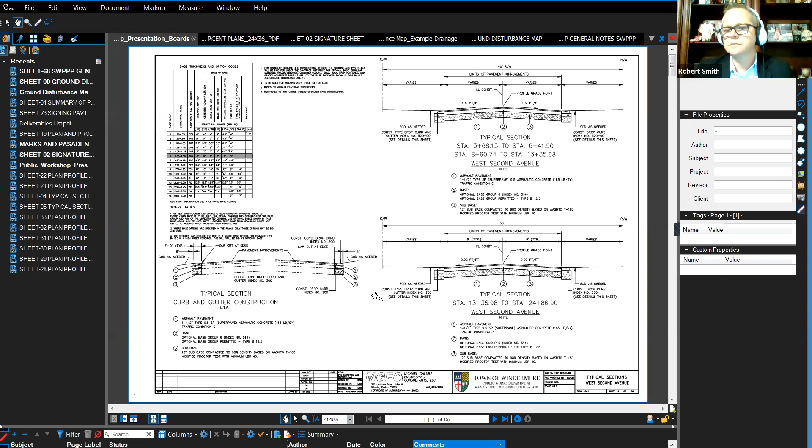From there, the project will extend east where it will connect to the existing section of West 2nd Avenue that was recently completed by the town. The roadway width is going to vary because we would just essentially be tapering from the existing pavement width on the east end and connecting to the cul-de-sac. So the pavement is going to slightly vary.

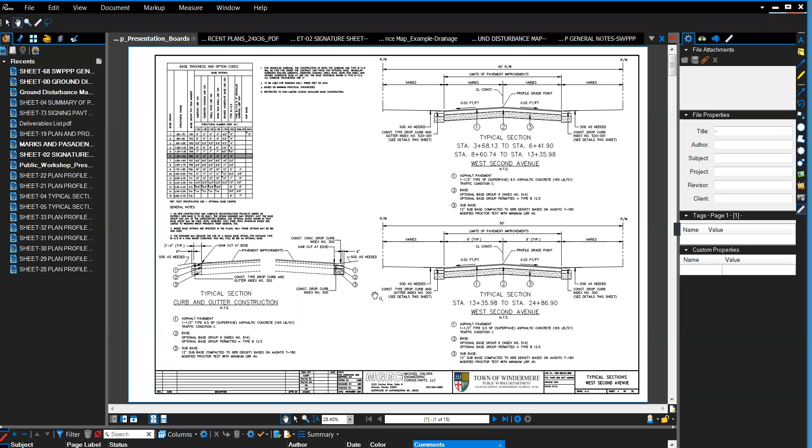It'll be somewhere in the vicinity of anywhere from probably 8.5 to 9 feet in general, but that's not fixed. It's going to be a transition type pavement width. Mike, if you can do me a favor and just go to the colored exhibits.

As most of the people on here right now know, a lot of the details sheets are Greek to me, I can't read it. But you can show where the existing and future improvements will be on some of these. These are items that were discussed at length with the property owners.

So they should have a good idea where everything's going to be located. I believe the blue is the water line. Is that correct? Blue is a proposed water main, correct? All right, thank you. The gray is essentially where the proposed pavement is to be constructed, and we've pretty much stayed close to the existing pavement width.

We'll be constructing a ribbon curb, which will provide strength and really provide integrity to maintain the edge of the pavement so that it doesn't break off. Mike, real quick for us non-engineers, what is a ribbon curb, and is it different from the curbing that is proposed throughout the entire project?

A ribbon curb is merely this right here. It's nothing more than a 12 inch by 12 inch concrete barrier that will be constructed along the edge of the pavement so that the pavement just doesn't break off.

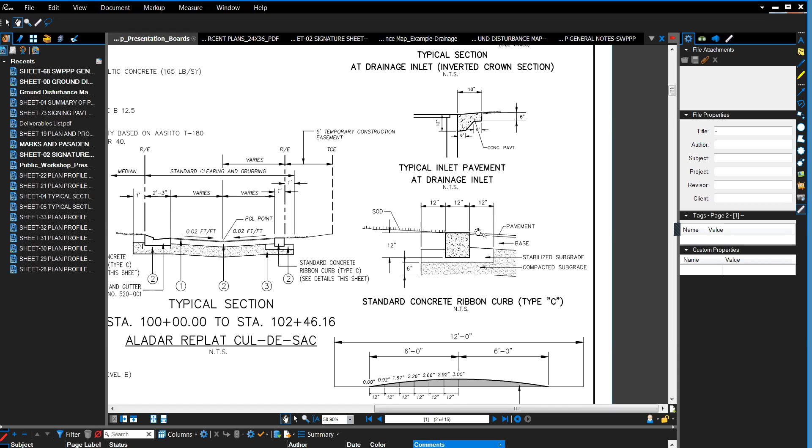All right, so something that you would see in a typical suburban HOA. Correct. You see a lot of it in this type of condition where it's in very tight quarters with really low traffic volume. And is that the same or different from what's proposed, like in front of McCarthy's house or the Kirby house?

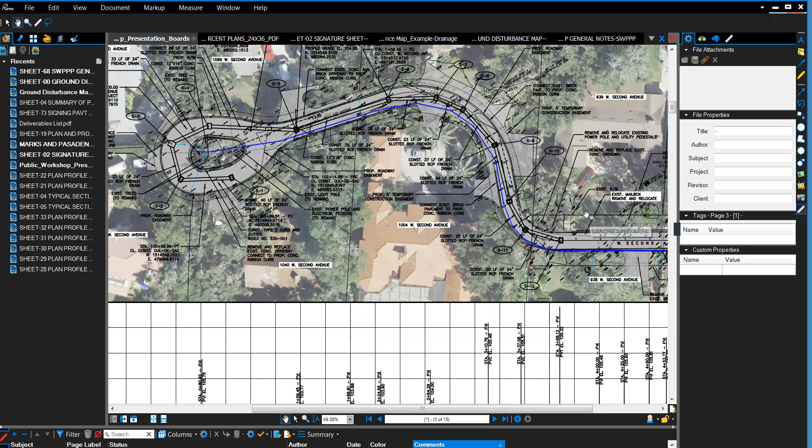It will be different because of our limited right of way. We ended up using a standard ribbon curb, which is only 12 inches in width. The curb and gutter we'll be using for other sections of the roadway will be approximately 2 feet in width, which provides a gutter to allow water to flow into the inlets that will capture the stormwater runoff.

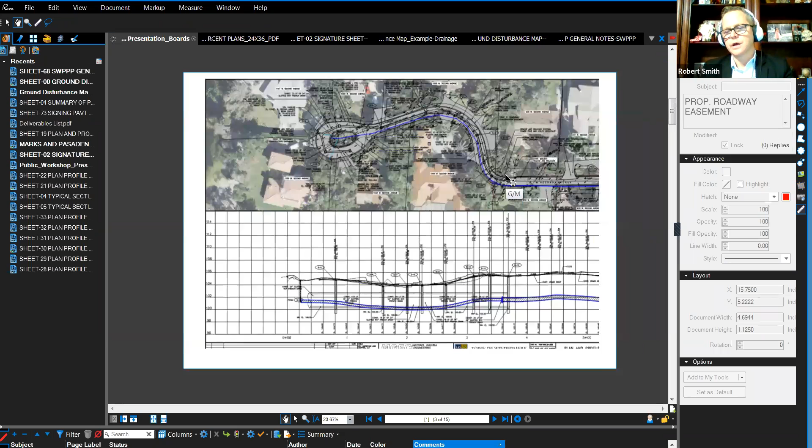So the ribbon curb is more horizontal, correct? Okay. And then the other type of curbing that we're going to be putting out throughout is going to be an additional 24 inches, which is going to be able to allow people to park on, so on and so forth, correct? Correct. It will be what they call traversable.

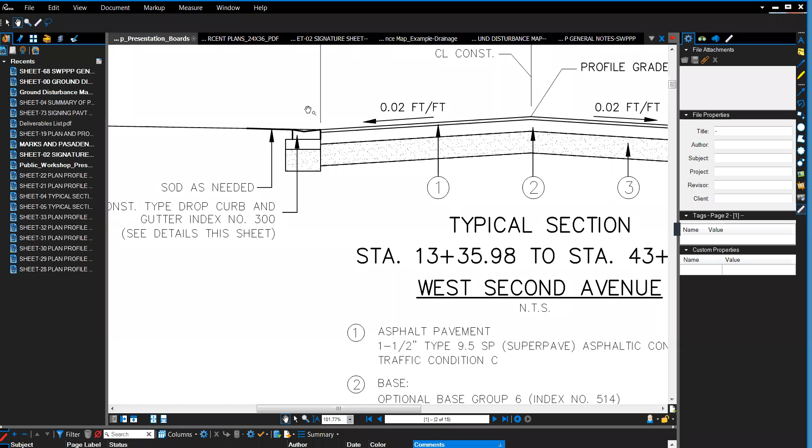This is probably a better view of it, you can see what it looks like. It's not your standard barrier curb, where it extends 6 inches above grade. It is traversable, so if residents need to use the right of way for parking or for access for the landscapers, they'll be able to drive over this curb in order to access any parking needs.

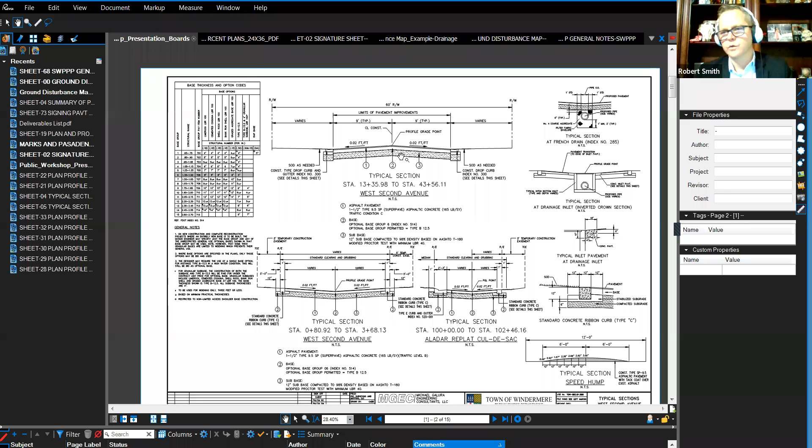So the two areas that are previously improved, you'll see exactly what's going out there. The only change will be when you get to the end, the cul-de-sac, is when we change the type of curbing. That's correct.

And then when you talk about a crown roadway, that means you're doing it like this, as opposed to just directing the stormwater to one direction, correct? Correct. In other words, a crown roadway is pitched such that water flows to the outside of the roadway, from the center to the outside.

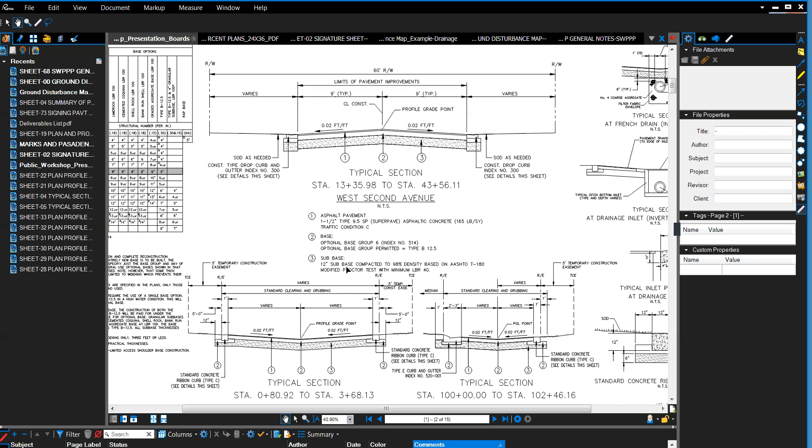In the cul-de-sac, because of the limited right-of-way that we have and because of the need to provide drainage, we're proposing what's called an inverted crown, where the road pitches from the outside to the middle. The stormwater management and drainage facilities will be constructed in the middle of the road to collect any stormwater runoff that comes from rainfall events.

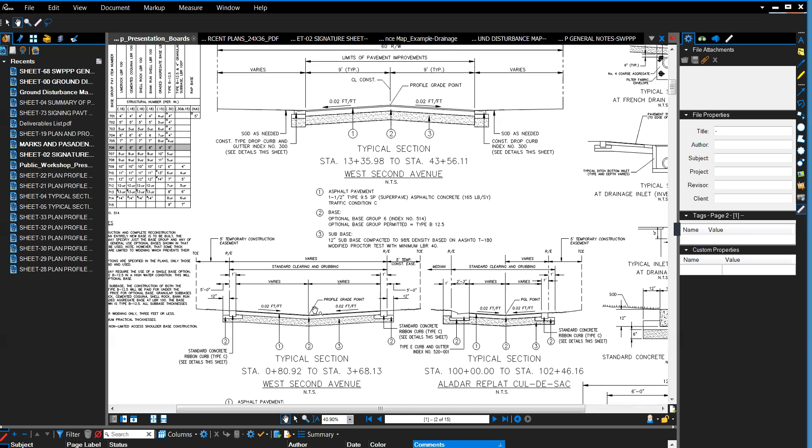Moving on to the next slide. You have to excuse me because these are large slides, so sometimes it takes a little longer for them to pull up on the computer screen.

Again, this is the cul-de-sac, and where we will change right of way is at this juncture here, because this is where the town has right-of-way ownership to the east of this point, to the right. So we will be maintaining the existing right-of-way from this point here on.

Mike, I hate to stop your flow, but as far as people's aprons, their driveways, are we replacing in like kind?

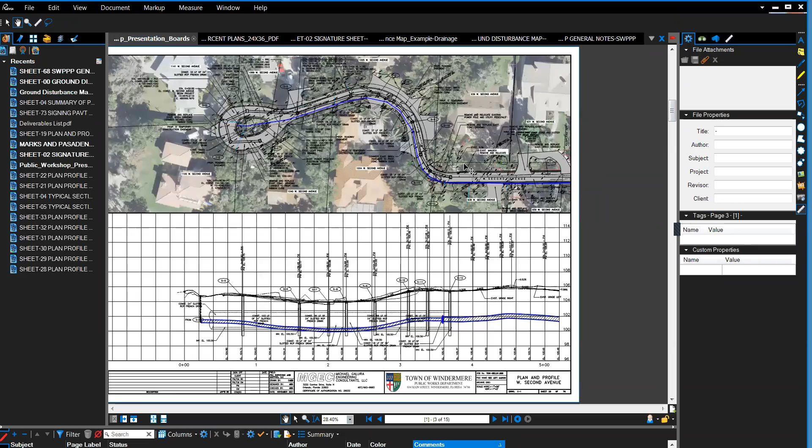We'll work with the homeowners on the driveway replacement. In past projects, myself and John Fitzgibbon have worked closely with residents on the type of driveway they'd like replaced. Most of these are brick pavers, and we would try to maintain them to the best that we can, if that's what the owner would like.

We'll work with each individual property owner on your driveway apron, as well as landscaping. We've done that in the past, and done a lot of site visits - Tanya and John have been out there a lot, as well as Mike. So during construction or prior to construction, if you have any issues, just let us know ahead of time.

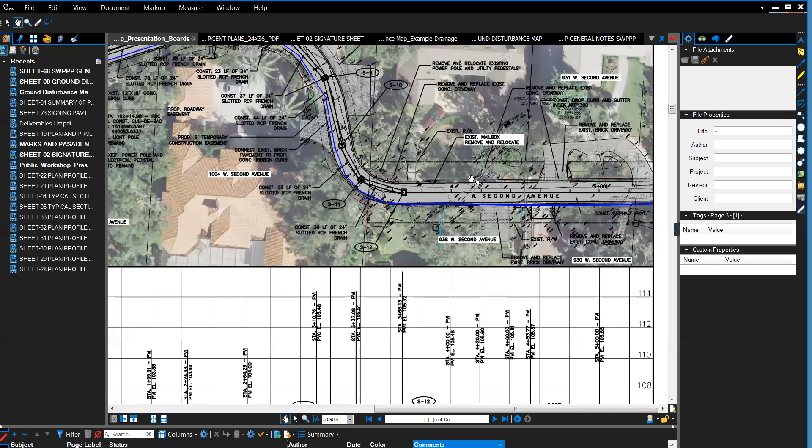We've done that with irrigation features, where we've capped the irrigation and restored them after, once we're close to completing construction. Again, we would work with a homeowner on the landscaping features they would like to maintain, revise, or remove.

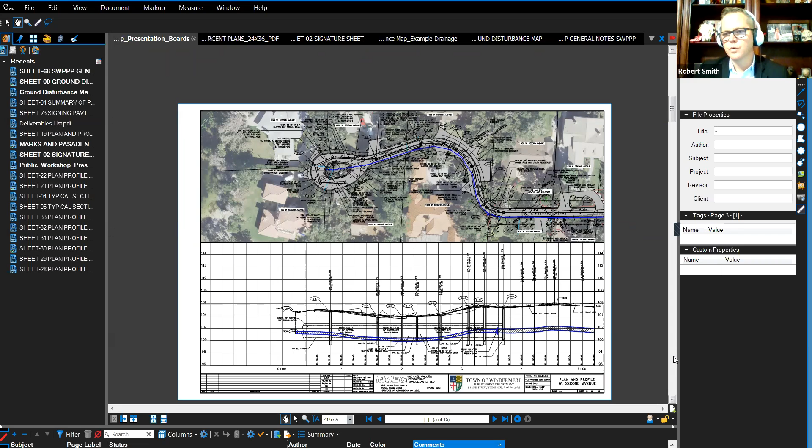The only reason I keep jumping in is because these questions have been asked for the Bessie and Butler projects as well. Just because you see the potable water on one side does not mean it's not accessible to the other side of the road. We're stubbing it out to each and every residential property, meaning everybody will have access to potable water if they currently do not, and you'll have the fire flow protection you need. In addition, we're doing arborist reviews, so any and all trees we can save or protect, we're going to.

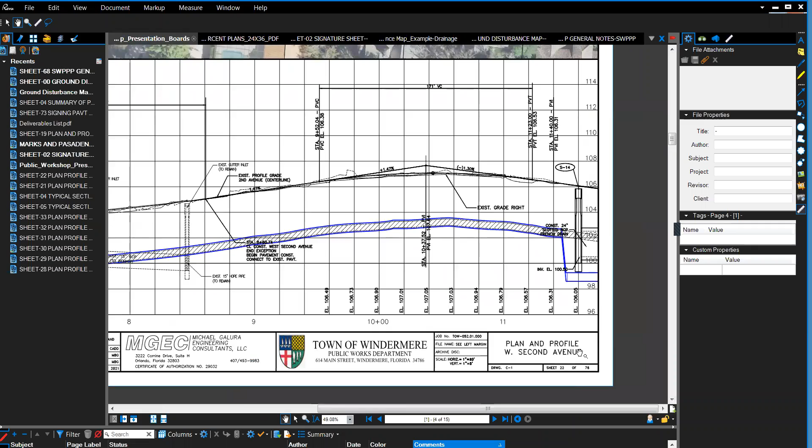Moving on to the next slide. Make sure I've got this the right location. This portion of roadway from here to here - let me just see if I can enhance that for better view.

This section of roadway was completed previously by the town as part of drainage improvements for this portion of 2nd Avenue. So wherever this existing pavement begins here will connect with our improvements to the west and also to the east.

We're also going to be redoing that pavement section, so there's a consistent look, feel, and the same maintenance schedule as the entire roadway.

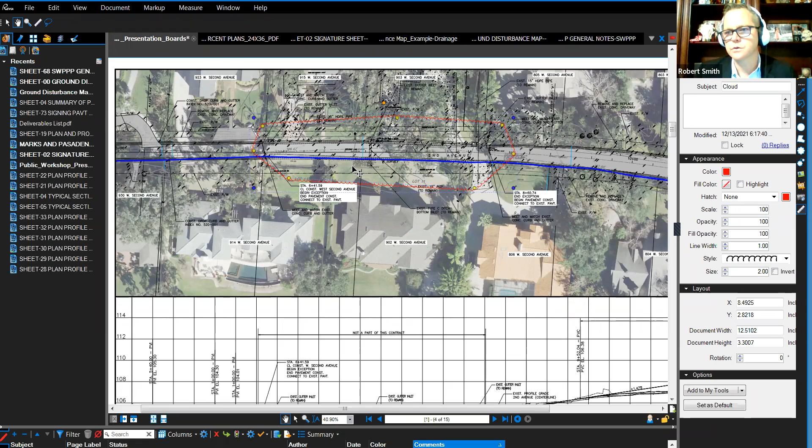What we'll be doing is scraping off the top inch of that existing pavement. Then when we come back and resurface the entire roadway, this existing portion will also be resurfaced with that inch of pavement so you have a consistent look throughout the entire length of Second Avenue.

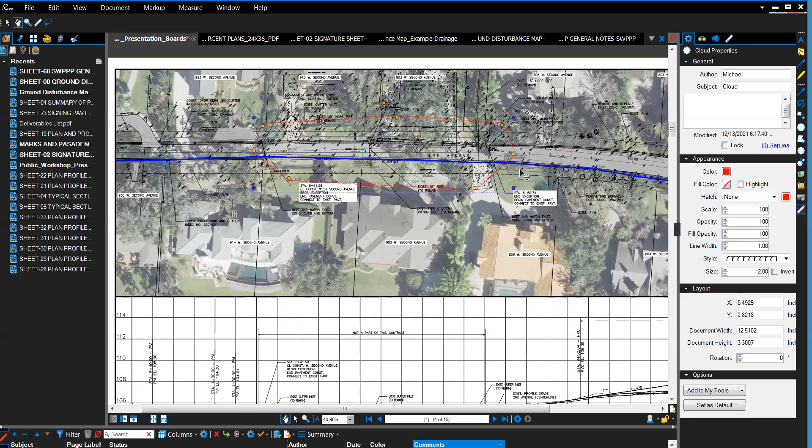Some of the things we'll also be doing is looking at where we want to minimize disturbances with the construction of the proposed water main along the south side of the road. We'll be trying to minimize those impacts, whether shifting the water main to the back of the curb and minimizing impacts to the existing driveways.

The reason we can't put it in the middle of the roadway is Orange County Utilities will not allow us, and plus you don't want it in the middle of the roadway because you'd have to tear it up every time you have to do a repair.

Mike, another question - has this design significantly changed from the last time it was proposed to the residents? It has not. The only thing that has really changed is we've kind of tweaked the width of the roadway to try to maintain some of the existing roadway widths west of these improvements that have been completed.

So the cul-de-sac area pretty much. Right, to the cul-de-sac area, correct. Now further to the east here, we'll be transitioning from the existing width at this juncture here. Eventually, because of the availability of right-of-way, we're trying to maintain at least a 9-foot lane, which provides two-way traffic access in either direction, especially for trucks.

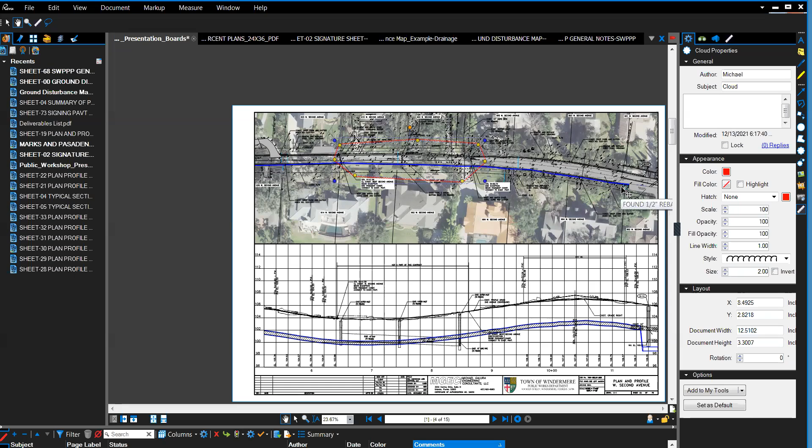Right now, people are having to pull off and allow traffic to get through before they can traverse themselves. So with the proposed configuration, traffic will be able to get by in either direction without having to pull over. Meaning the total width would be 18 feet plus 2 feet on either side, which would be 22 feet - the additional 2 feet would be the curbing.

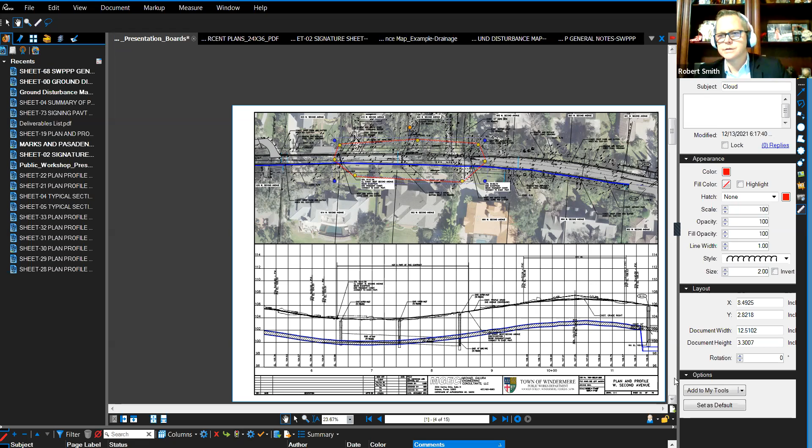So you have a 9-foot width for a lane plus 2 feet, which is a standard 11-foot lane. The same thing would be to the south lane, correct Mike? That's correct.

Moving further east as we get into the first curvature of West Second Avenue, we'll be constructing drainage improvements along this section of road because there is basically no infrastructure there. We know there are low areas within the roadway that result in ponding and pooling of water. So we'll be collecting that stormwater in a French drain system that allows water to be captured and percolate into the groundwater.

We've also been working with some of the residents on the inlet locations. I know there was one inlet that we ended up shifting because it was located in close proximity to their driveway, so we moved it away so it doesn't impede their access to the property.

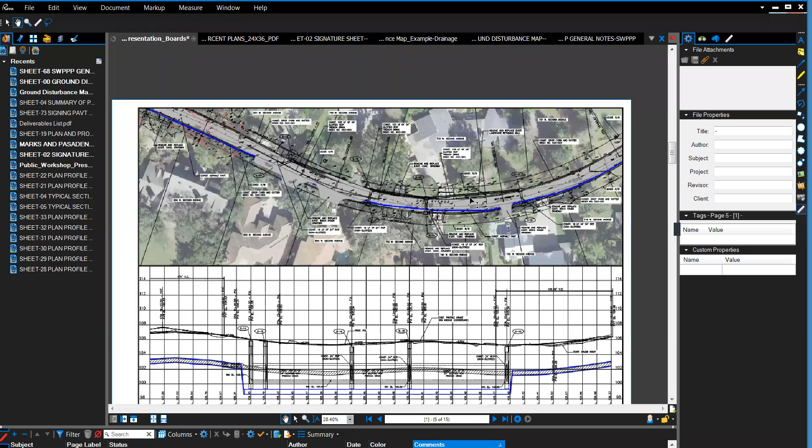Yes, the intent is to maintain the speed humps wherever we can. I know there's one in this vicinity, but we may end up shifting it slightly because it would be in the way of the proposed drainage. The intent is still to provide a means to control speeding along West Second Avenue by maintaining those speed humps.

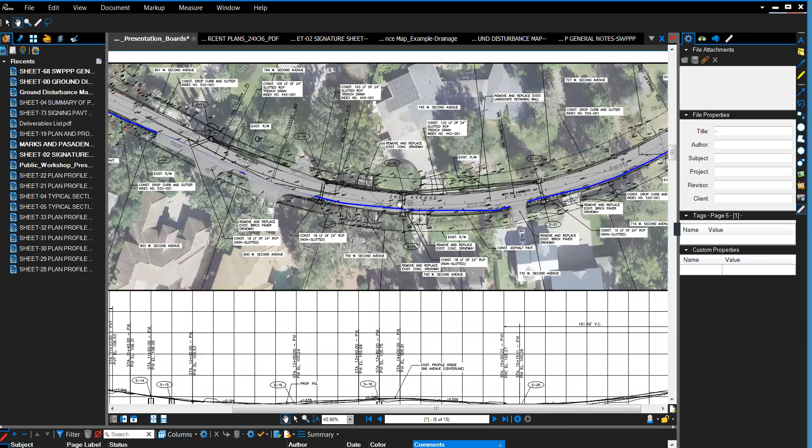Are we going to maintain the exact same look and feel of the speed bump, or are we looking at a different type? It would probably be a little different, probably not quite as abrupt a hump.

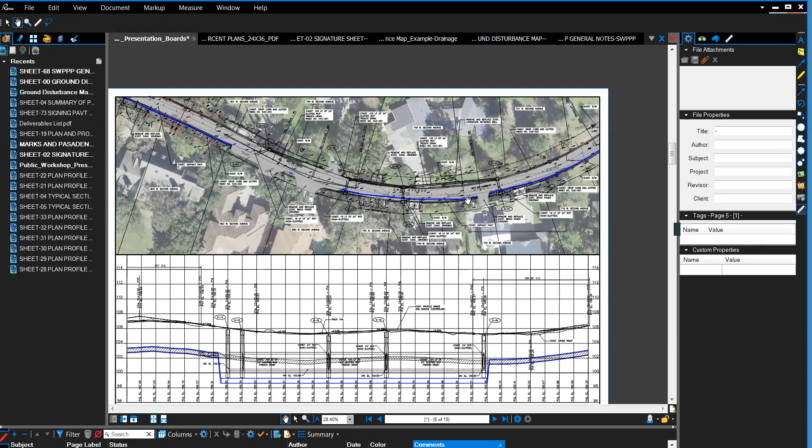We went and looked at some of the various municipalities in the county to see what they were using, and we think the one we'll be proposing will be adequate. It's the one constructed for the section of West Second Avenue between Palmer and Pine Street, right in front of Palmer Park. So the speed humps would basically be the same configuration.

A question just came through: how do we ask a question? Once we get all the way to Main Street, we can go ahead and open it up for everybody.

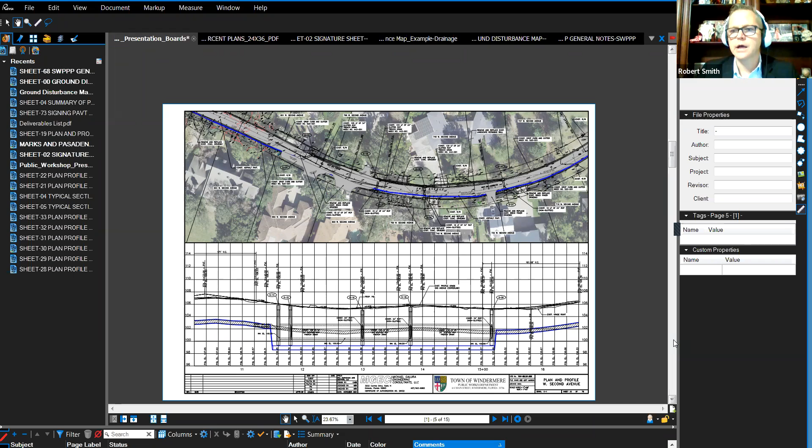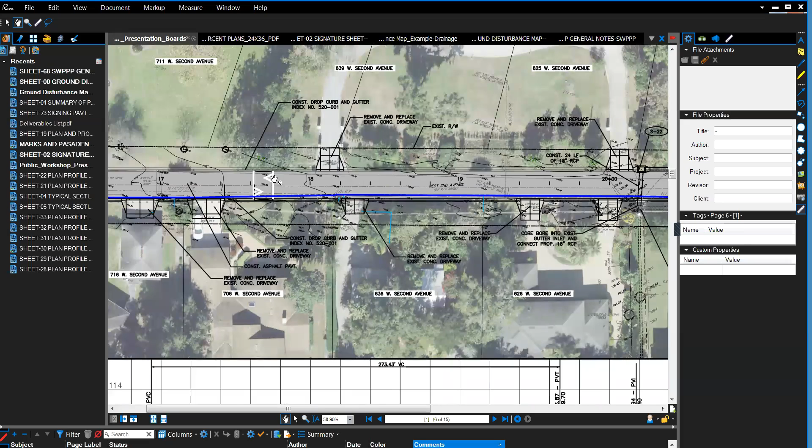Again, continuing east on West Second Avenue, here you can see one of the speed humps we're proposing in this vicinity. The speed humps will be enhanced with pavement markings to clearly identify where they are, so the driver isn't surprised as they approach.

Again, the water main is currently aligned on the south side of West Second Avenue, and we'll try to maintain it in that same general vicinity.

Those of you who currently have potable water systems, we'll be putting in dual lines. So your service may be interrupted just for a couple of hours, but it's not like it will be interrupted for days.

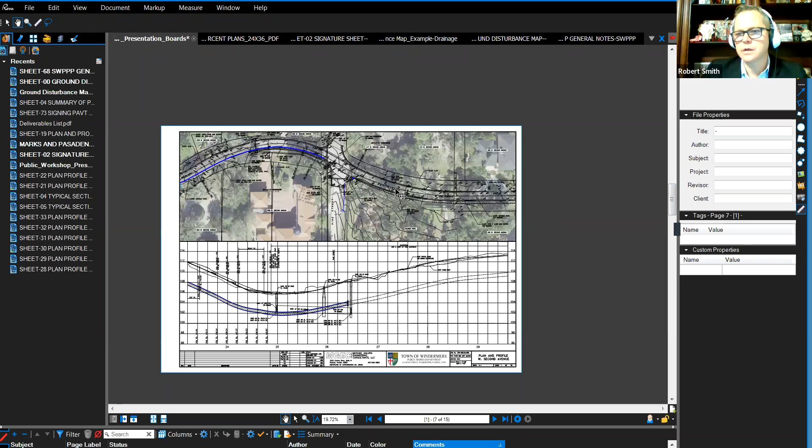This is where the project will again terminate at the existing construction limits previously completed by the town. Let me just highlight where this is - that's Second and Pine, that's the Lee property.

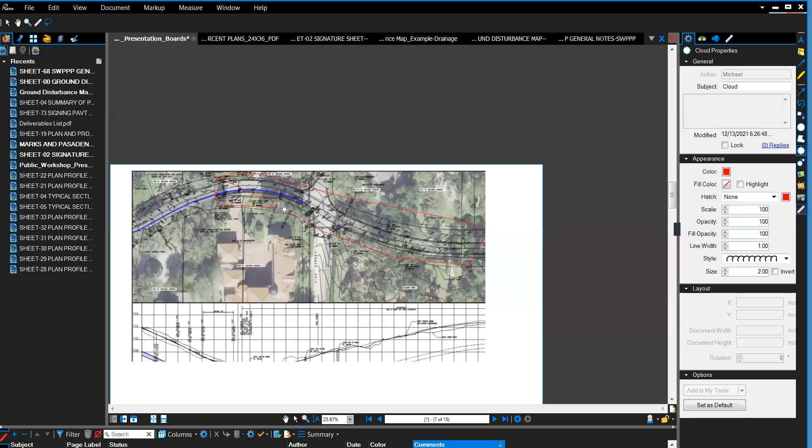This section of West Second Avenue was previously completed by the town under a separate capital improvement project, so both the drainage and roadway improvements were completed under that project. So we will not be reconstructing the roadway, but we will come back and remove the top 1.5 inches of pavement, then replace it with new pavement to match the rest of the project.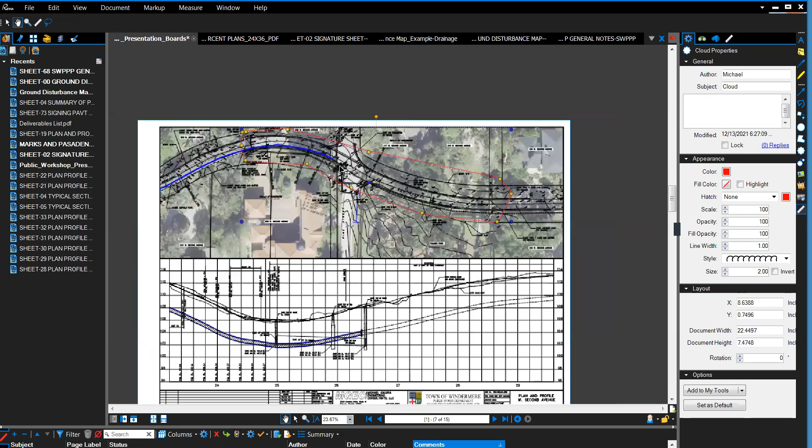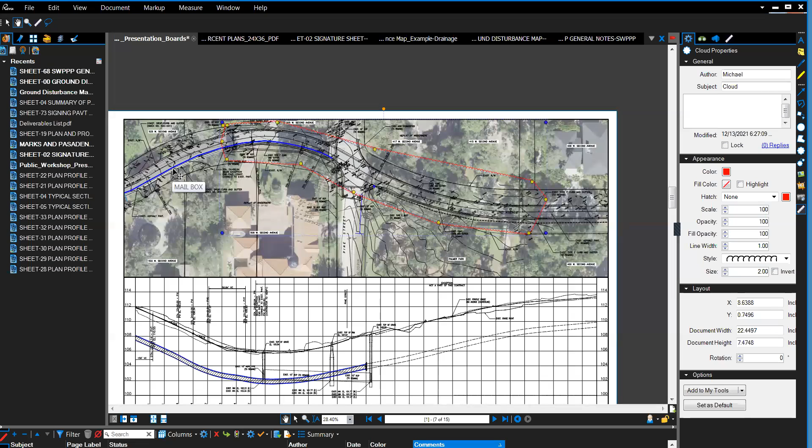This is also where the water main improvements will terminate, pursuant to the town's master water main plan. The water main west of Pine Street is only a 6-inch water main, and I believe what is recommended was to replace it with an 8-inch water main in order to provide sufficient fire flow and pressure for any residents who want to tap into the water main for potable water service in lieu of their existing wells, if they so choose.

We pick up the project again just west of Palm Street, where we begin our 9-foot lanes from here all the way to Main Street. We'll be looking at extending the pavement along some of the side streets like Palm Street and Butler Street, in order to provide a means for any traffic sitting at this intersection to sit in a paved condition, and also to help facilitate drainage, since we have significant drainage coming down these streets into West 2nd Avenue. Our intent is to better capture that stormwater runoff and direct it to where it needs to be collected and drained.

You see something similar on Main Street, where there's an apron coming off of Main Street, maybe a stacking lane that carries about 2 cars before you hit the dirt. It's better for maintenance as well.

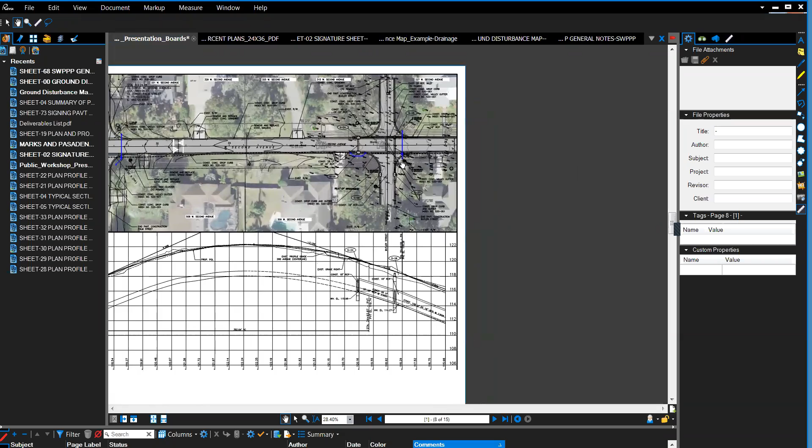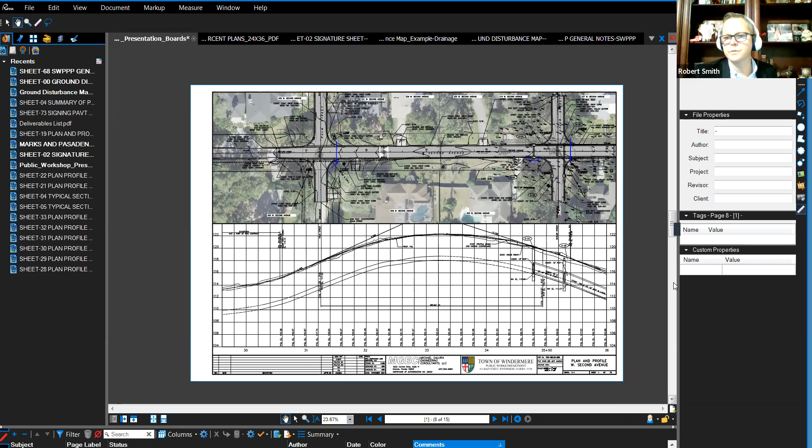You're talking about Forest, Mike? Yep, eventually going down 4th Street. Yeah, we've had lengthy discussions with the Mitchells and Gonzalez's on the northeast and southeast corners. We're currently under contract with Cathcart Construction to do the stormwater improvements on Forest. We actually did a peer review with Michael Orr and Kimley Horn Associates to make sure everyone was on the same page for the improvements on First and Forest, to make sure that stormwater is being remediated.

In addition, if you didn't know, we are paving old dirt Main from 2nd Avenue to the canal. That's just been a mud bog for quite some time. We're hopefully going to be doing that in conjunction with the Ward Trail project, which we have another public meeting on Thursday.

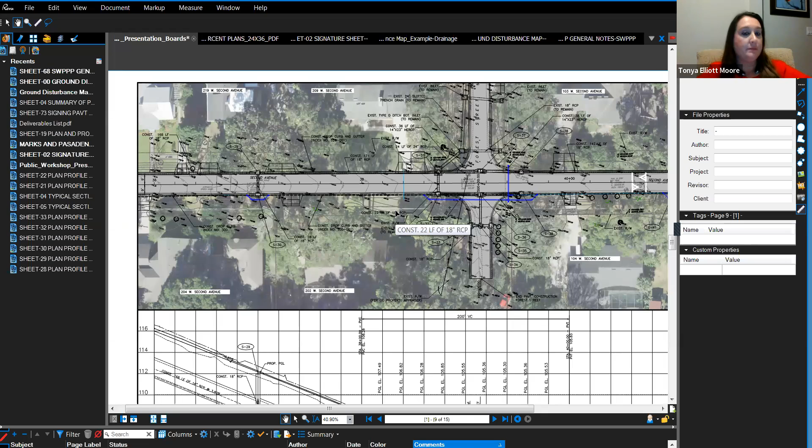Tonya? Wednesday, I think it's Thursday. We have so many meetings this week that I'm trying to cram everything in, but the First and Forest project is under peer review, and that should start within the next month or so. Yes, sir, it's definitely Thursday. Thursday at 6 p.m. Yes, sir.

All right, so the terminus is over at Main Street. You can see here where Mike has made some potable water changes. Is that correct? Correct. What we're doing here, as part of the town's master water plan, is that in the future the town would like to connect all the streets with their water mains so the system is looped, so that if there's a break or a section of line needs servicing, there would not be a loss of pressure from both a fire flow perspective and a consumption and potable water use perspective.

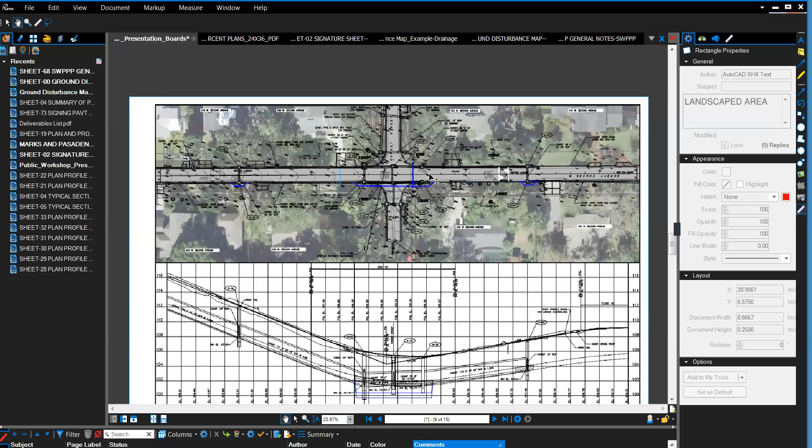So we are proposing to extend the water main along each one of the side streets, so that in the future the town could make these connections and provide that looped water main system. You also want to loop it so it doesn't create a septic issue where you'd need to blow off the line or something, because if water sits still, it's not going to meet the standards you'd want in your faucets.

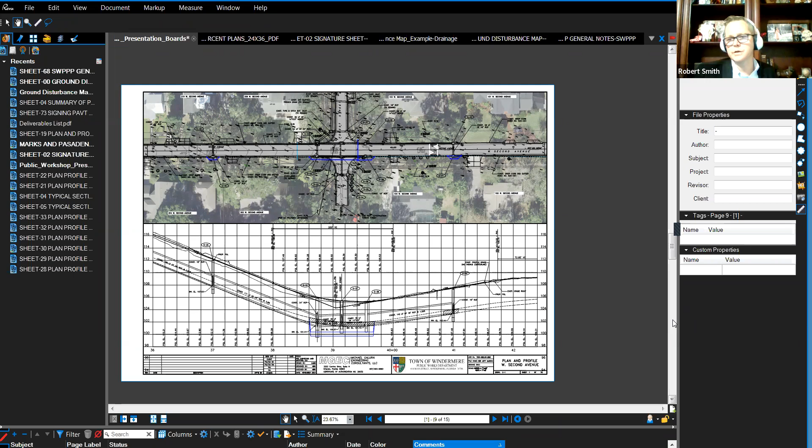A lot of the questions we had previously in the Butler and Bessie projects were, am I going to be required to hook up to Orange County Utilities water? Now, if your well goes bad, the Department of Health will not approve a new well to be drilled. They will require you to hook up to Orange County Utilities. So we'll stub it out to your property line, and then it would be up to you to work with Orange County Utilities to set a meter and then work with a plumber to plumb it all the way to your house. You'd still be able to utilize the well for irrigation purposes. Correct.

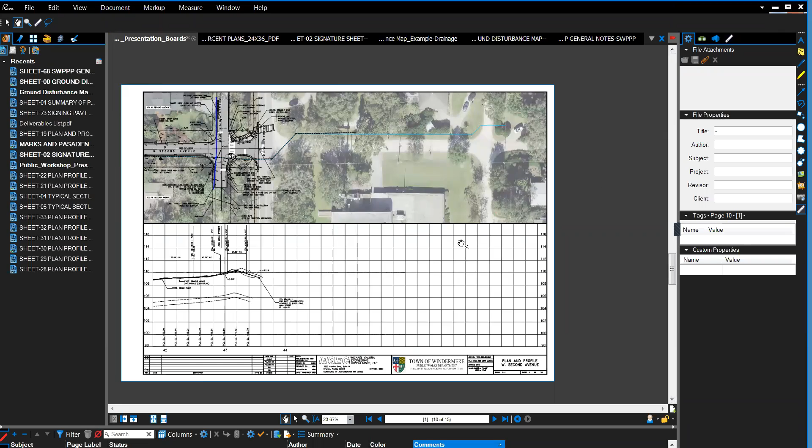This is the terminus of the project, where it would terminate at Main Street. We would connect to the existing pavement on Main Street. We're still working on the configuration here at the intersection of West 2nd Avenue and Old Main to confirm the final configuration and alignment of the paving of Old Main. I've been working with Kimley Horn and Associates on getting that finalized as well.

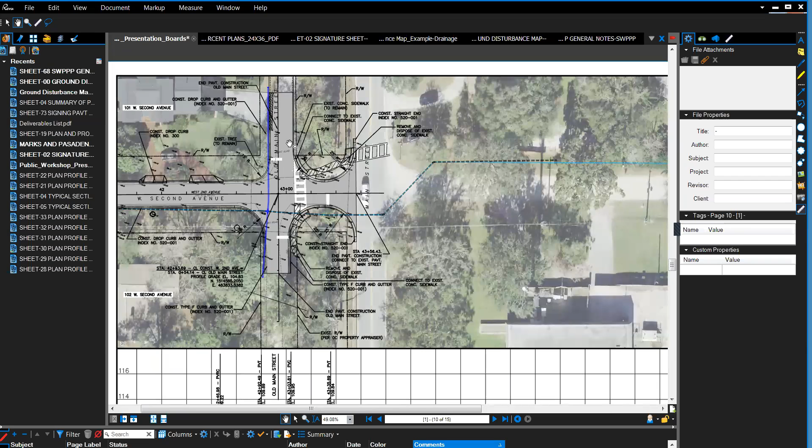Robert, has all the right-of-way taking been completed for Old Main? Yeah, taking is such a bad word nowadays. We have negotiated a contractual price with the Massey's, Singers, Hart, and Silva, or Gupta. We were just waiting on the Denoyles to agree, but if not, we would have to go through the eminent domain process. We're offering the same exact price that we purchased the Ward property for. So they've agreed to sell that property on that corner, so we can proceed as we've spoken about earlier. But the old Main paving project will wait until we're able to acquire the Denoyle property.

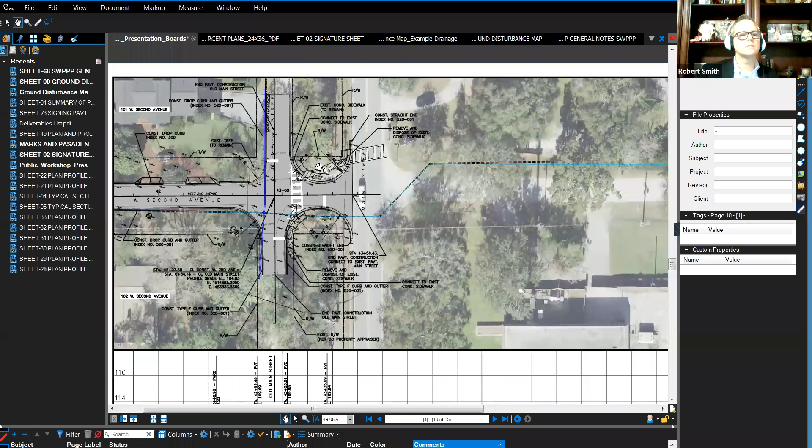And that's all we have as far as the presentation. Pretty much everything is exactly the same as it was with the 40% plans, just some minor tweaks, working with Orange County Utilities. We're having to send them more hydraulic calculations for the flows to make sure that whatever we're planning is adequate for fire protection and the loop system. At the cul-de-sac, there's not an ability to loop the system, so we will have to do some sort of blow off, and if there's a question on that, Mike will be happy to answer it.

But there is a blow off there already, Robert. From my understanding, that will be maintained. So what you do is just open the water system, let it flow for a little bit, and then close it.

With that said, we're more than happy to answer any questions you may have. If you can raise your hand icon, or type a question in the box, or just raise your hand in the video. The first one I have is Ray, Florida.

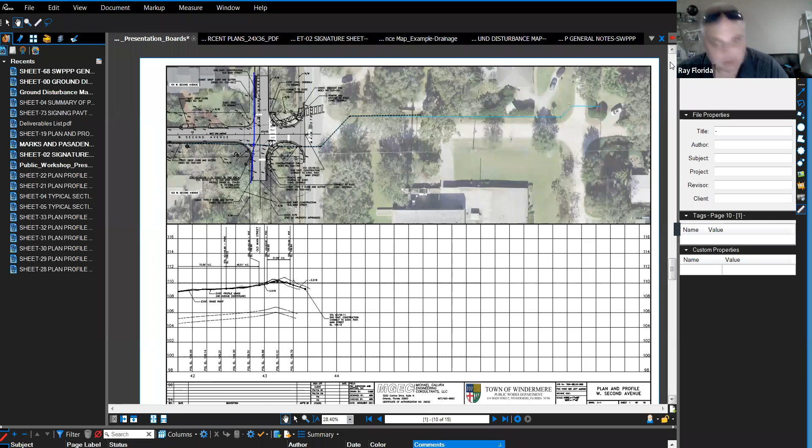Hello, can you hear me? Yes, sir. Oh, that's great, first time I've used Zoom. I live on 209 West 2nd on the corner of Forest, and I spoke to John Fitzgibbons about a few issues last year, but I didn't hear anything, so I just wanted to see if they've been noted.

Right, everything at 209 West 2nd Avenue, right here. Yeah, that's correct. Unfortunately, John wasn't able to make the meeting tonight, his daughter's moving back. He said he'd take note. When he met me last year on the walk around, we went through things and he said he'd make a note of it. The first issue was the fact that my water meter is in the wrong place.

It's actually smack in the middle of my driveway. And when I tried to ask Orange County to get it moved, they said, oh, you might as well wait until the road's going to be redone in a few years' time. So I'm just seeing if that issue was noted. Yes, we'll make sure it's noted. Certainly, we will look to relocate that water meter such that it provides you a better configuration for your driveway.

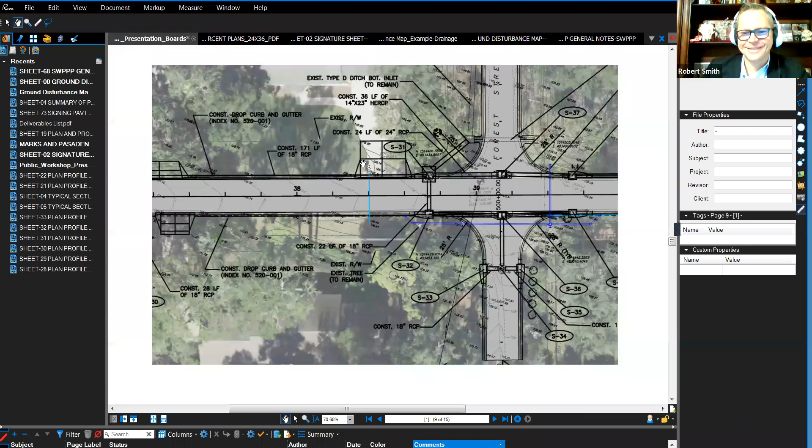I want to try and straighten the driveway. At the moment, the driveway goes around the water meter, and everyone keeps driving onto the yard. Right, just like this, you want to just take it straight this way. Yeah, dead straight, so that means the water meter has to go slightly to the left. Yeah, right, that shouldn't be an issue.

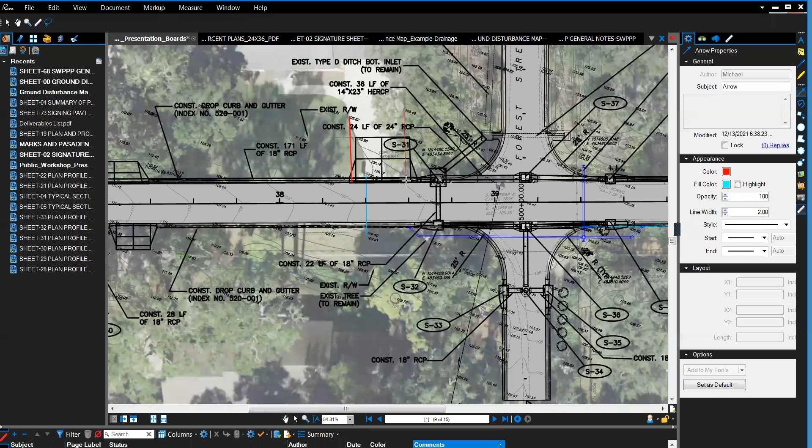I'm presuming this is what you're considering for your driveway. Exactly. Yeah, that's how it should have been originally, but we couldn't do that because the water meter was in the way. So we will certainly work on that.

Also, I guess, was there a question with regards to the water that comes down here right now? Yeah, currently it's terrible, that erosion along there is really bad. I was concerned that just a flat gutter is going to overflow. Well, we may consider, because we're picking up water further upstream here. Yeah, because right now everything just drains right here. Exactly, it's been a major headache for years.

We may consider looking at adding an inlet somewhere in this vicinity here, just to keep water from getting here and turning and going down your driveway. Yeah, well, it's not so much a driveway, it's more the front yard, and it seems to just erode it continually. We've been fighting it for years. That's why I thought it would have been better to put a step curb or step gutter on it rather than just the flat gutter. I know I've seen some logs put there before.

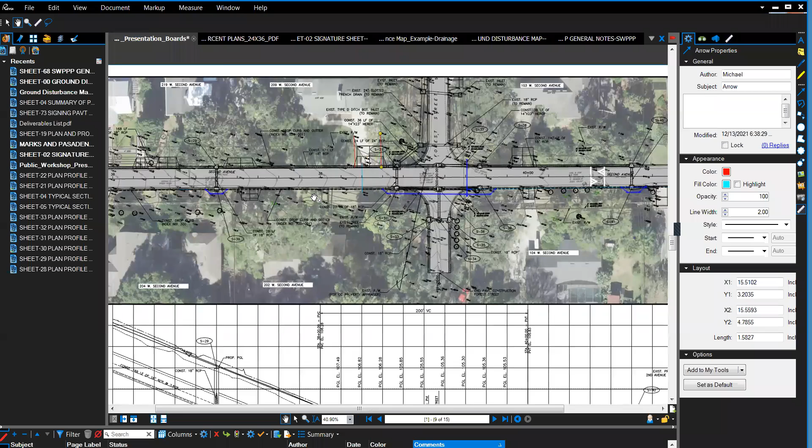Yeah, last resort. So we're looking to try to improve the ability to collect water and keep it from getting off the roadway into the private property. Yeah, that's great, as long as you know that, so you've noted that. It's perfect. Right, correct, we've made note of that, and we'll make that consideration for our final design. Great, I appreciate it. Also, last question: are you going to start at one end and work towards the main street, or are you just going to do the whole thing in one go?

That's a good question, because a lot depends on how the contractor wants to approach it. He may break it down in segments, where he does the cul-de-sac on the very far end first. A lot of it depends on where he can store his materials and his equipment.

We'll have a pre-con meeting with the residents as well, as part of the bid, so they can answer any questions. Make sure you have the correct point of contact, not only for the town's representatives, but also whoever gets the awarded bid, so they have a person and a face to contact for questions or issues. More than likely they'll stage it and make sure you're aware of when the staging occurs, as far as construction timeframes, to make sure mail service and solid waste still continue. More than likely we'll utilize some of the area by Palmer Park as the staging area for construction vehicles.

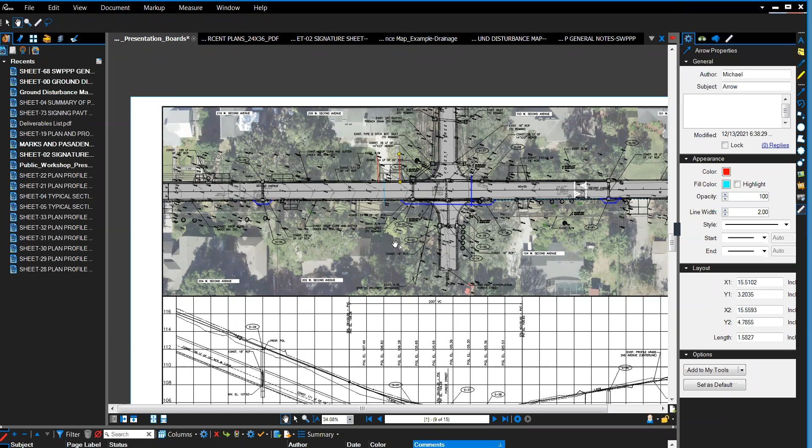Yes, Robert, can you hear me? Yes, sir. I have a question about the engineering drawing of 613 driveway. Could we go to that? I want to ask a few questions about it. 613, Mike, yeah, let me see if I can find where that sheet is.

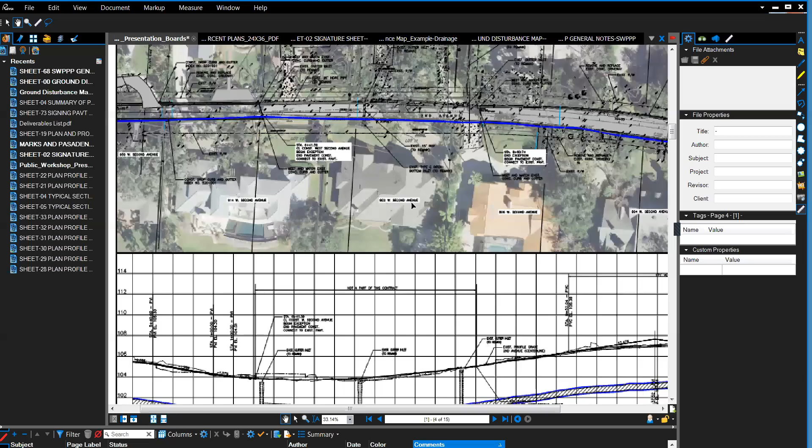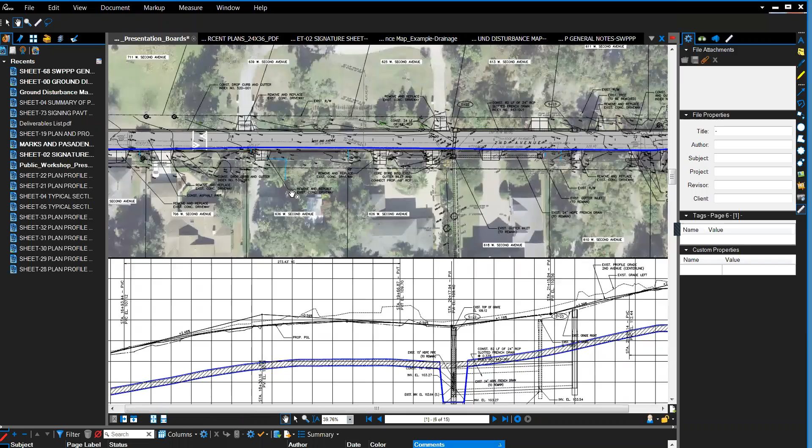Oh, it's too far. It's about 50 yards west of... let's see, says here we are. You better unmute yourself. You're unmuted. So be quiet. 613? Yes, right, here. So on this map, on this drawing, I can't find the driveway for 613.

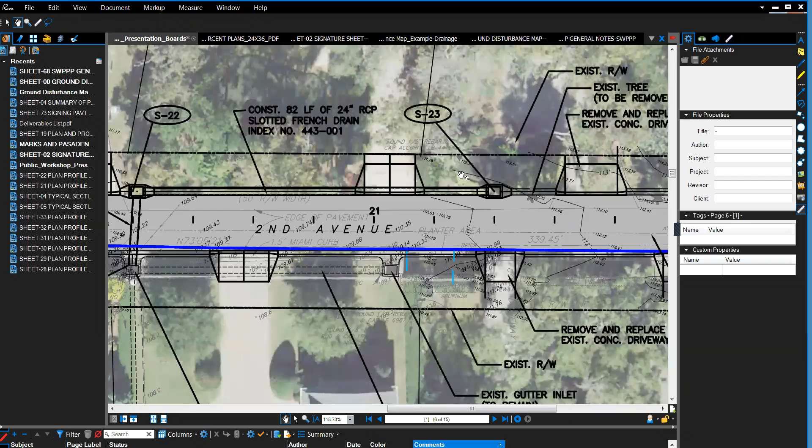You'll notice you have some construction on this drain, but nowhere. See where it says S23? To the left of that should be shown a driveway and a whole row of trees and a wall, and none of it appears on this. So I'm a little concerned that you haven't taken that into account, because you have to remove this driveway, or at least part of it, in order to maintain the width of the road. For some reason it was skipped over in the design.

Mike, it looks like it's hidden by the trees, so may have to do a quick revision to that and move the drainage to the east a little bit. What I'll do is turn off the aerial and take a closer look, because the aerial may be hiding where any of the other survey features are.

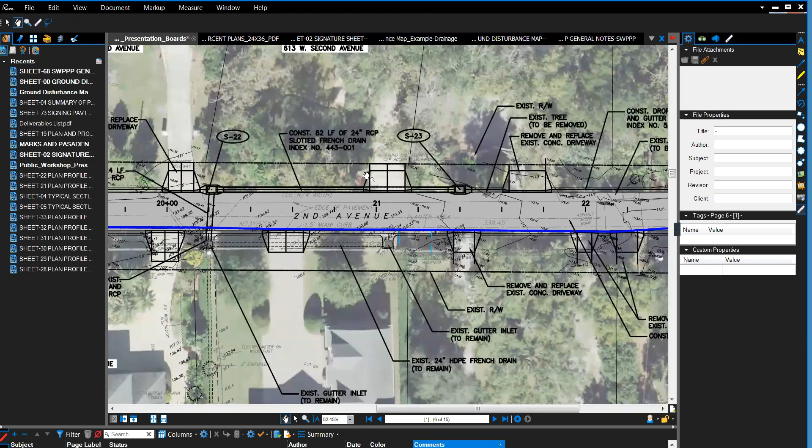All right, I think you can see the driveway for 611, and you can see the driveway to the right of it, to the left of it. But for some reason you don't have a driveway for 613. See, this long driveway is 23. This is the one we found for 613. Is this not the driveway?

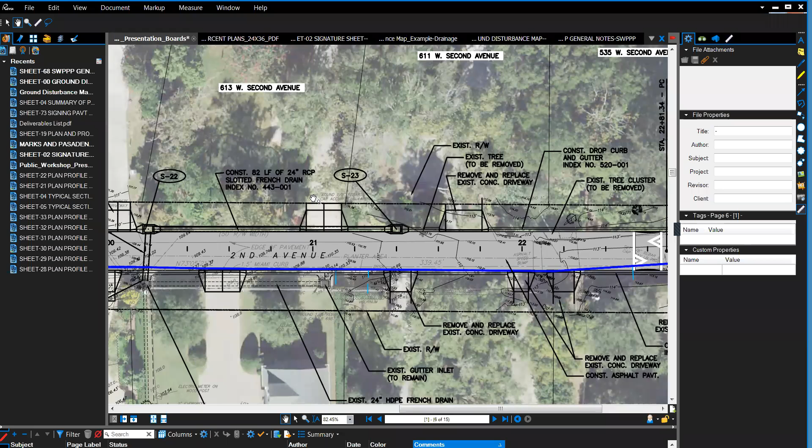You're saying this little box here is the driveway? Oh, okay, that is the driveway that we have proposed to replace. Yes, okay, so we do have it shown. I didn't know that was a driveway symbol. No, that is a driveway symbol here. So we are accommodating this driveway, basically going to be reconstructing this driveway here for you.

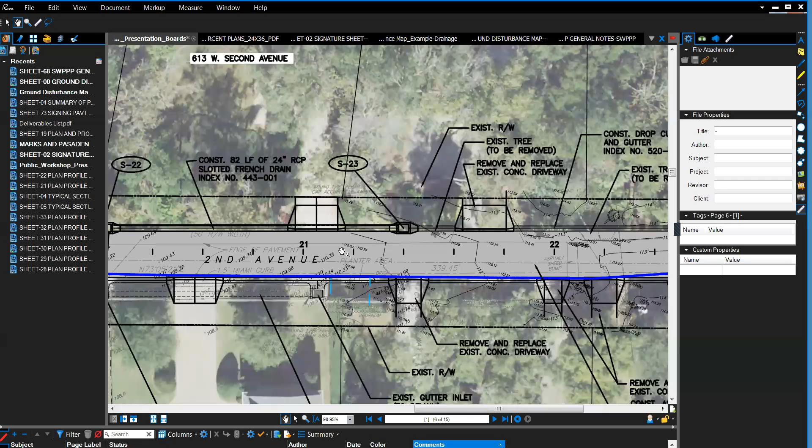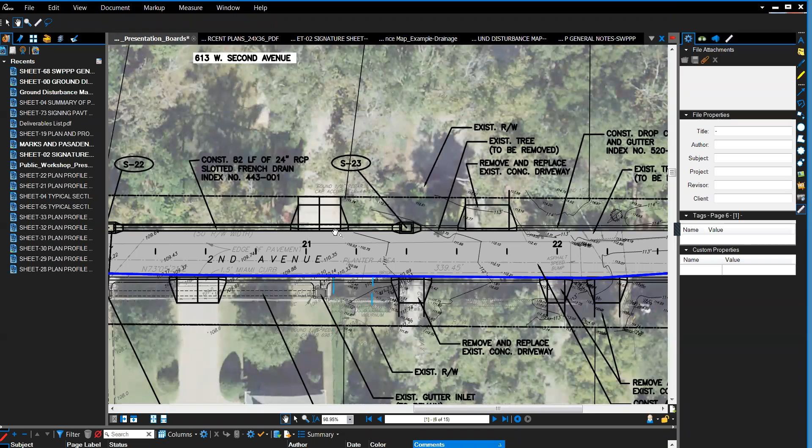Yeah, I'm sorry, I looked over to the east a little bit, Mike, and it looks like between the S23 and the apron, it just looks like there's some driveway there, but that may not be the case. I don't know. No, but yeah, we are accommodating the driveway here at 613. Okay, good. All right, thank you.

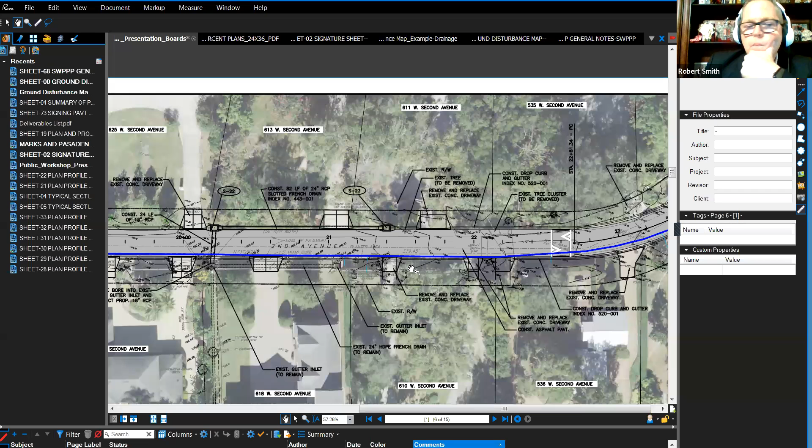Court? Sorry, I muted myself for some reason. All right, I lowered my hand. How are y'all doing? Good, how are you? Good, thank you. Thanks for all the input, we appreciate it. Of course, I'm here at 1040 West Second down by the cul-de-sac, Mike. Not anything too major on my questions.

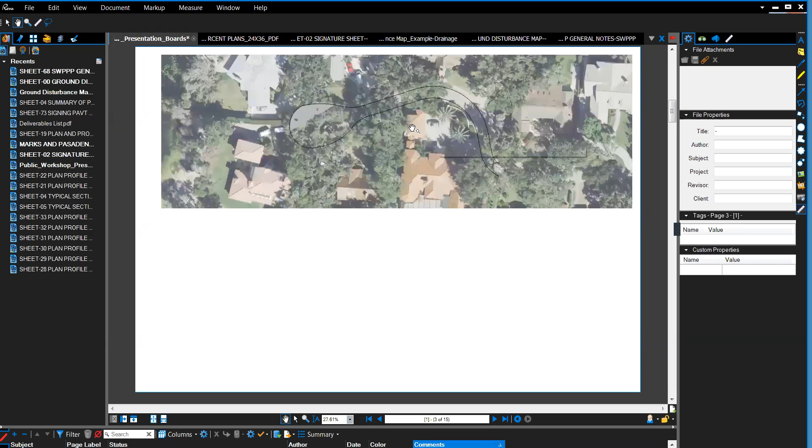The one I have is about a blow-off valve. Yes, there is one now in the island, and it's labeled as such. It says BOV on it, blow-off valve. And that's great, I didn't know if there are multiple kinds. I'm not a stormwater or potable water kind of guy, I don't know what it is. Is it supposed to pop off every night, every two weeks, every year, or is it manual where they come in and do it? The new one that's proposed, or are they going to reuse the same? I believe it's an automatic blow off.

The one that's here has never gone off yet, unless it's on an annual schedule. The only reason I mention it is I have a friend who lives in a cul-de-sac over by Kelso, and his goes off every night. It puts 3,000 gallons in the cul-de-sac and creates a perpetual puddle. He didn't even know what a blow-off valve was until it started popping off every night right by his mailbox, putting an incredible amount of water out. Whatever, it is what it is.

I understand why we have to have one. My only request would be, if it's going to put that much water out, it's going to wash away all the dirt in the island, kill the landscaping, and put dirt all over the road, creating a flood every night. So whatever engineering help could manage the amount and the final location, because it's labeled BOV right now.

I've lived here and it's never gone off. We'll certainly ask the county about that, because it is their facility.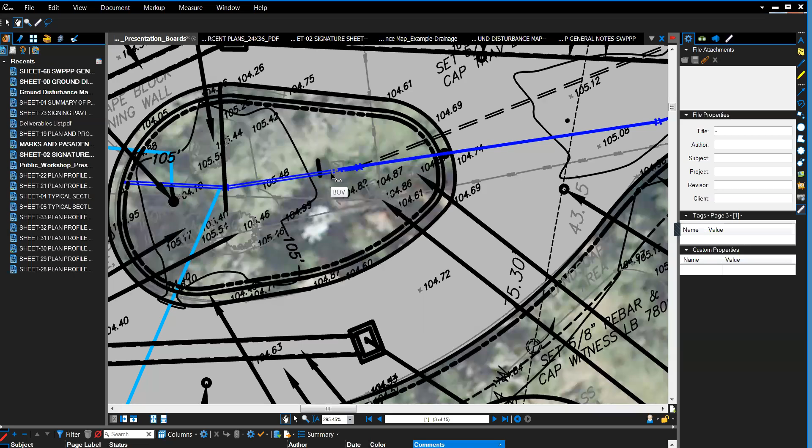I understand. So whatever we could do to help make sure it's in a position that drains and doesn't fill up the nice swale every night, and whatever the schedule is—if it's nightly, it's nightly; if it's monthly, whatever it is—but I know the one over in Kelso, the road's always wet, every day.

We'll make a note to chat with Orange County about what they're going to require there, what the frequency will be, and what type of blow-off valve will be used. We'll make that note to talk to them about it.

Appreciate that, thank you. And thank you for fixing the pothole today, at the corner. I know we're putting Band-Aids on it right now, but thank you so much. You're welcome.

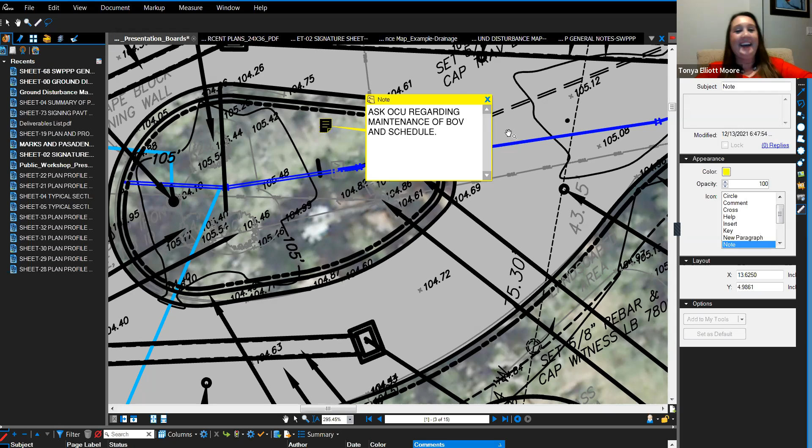Please let Public Works know as well if people notice. I didn't even say anything—see, it's a nice job. All right, and we got the thumbs up from John Fisher. There you go, thumbs up from Fisher.

Regarding space, Robert and Mike, as far as parking, our little street is tight. We all know this, so when someone's out of town we let each other know if we're having a party and can use their space. There's been some recent teardowns and empty lots. I don't know the timing of new construction, but I'd hope the town could at least ask, and I'd hope homeowners would be gracious enough to offer a use agreement or hold harmless, letting a couple trucks park in their lot instead of having to bring stuff all the way back down to the end of the street. Just something to offer if we do it a lot down here—on empty lots, neighbors' houses, stuff like that.

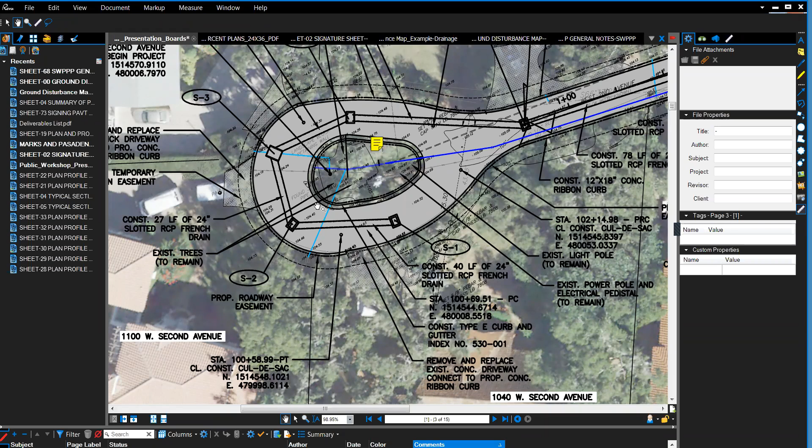The only last thing, more of a legal matter, Robert, is on the easement agreement. I read through it and thank you again, it looks great, but it says a temporary 5-foot easement, and I simply can't do that. Our drain field, again just the way it was done—it was all permitted—but it goes inches from the existing ribbon of asphalt.

That's just for construction purposes—I understand if we disrupt it, we'll make sure we repair it. But you can't drive on the drain field, it'll fail. Understood. I know it's tight, and whoever the winning contractor is, they'll see it and know it, but if they drive even 5 feet onto the land, it's going to damage our drain field.

So the town's not going to be in a position where we want to replace the drain field, so we need to be very conscious about that. I know this is minutiae—all this will work out when we get to the real deal. Thank you to everyone for all your information, and thanks for all that.

One last question—I know you mentioned, Mike, that it's going to be one continuous ribbon, the best we can, from end to end, so we won't have transitions at the places where we're not building new curbs.

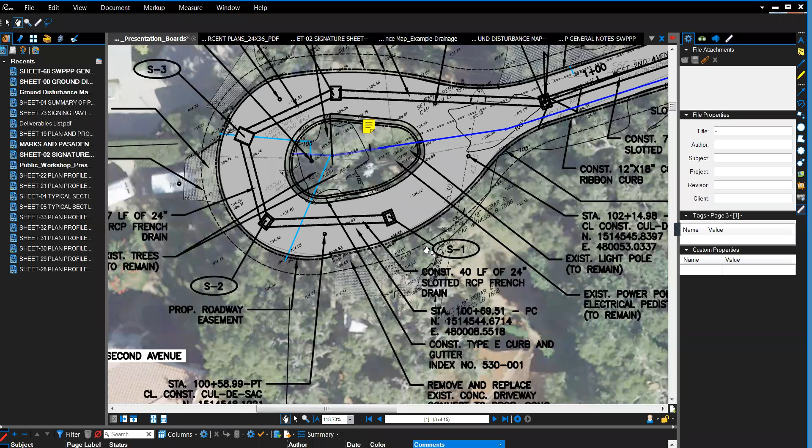The ribbon will only be from the cul-de-sac to approximately this location where it curves, because this is where we tie back into the town's right of way, and we go to our drop curb configuration. Correct. I'm sorry, I didn't mean ribbon curb, I'm actually talking about the uninterrupted piece of asphalt.

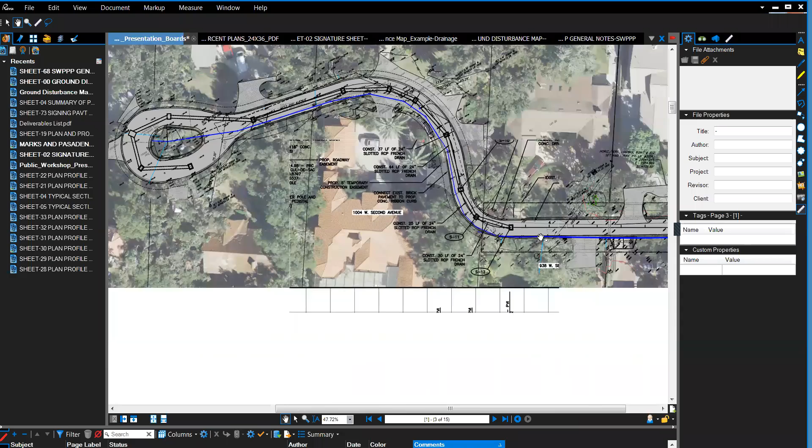Just curiosity - you said you're going to replace an inch or two even on the places that are nice now, just to keep it as one smooth piece from end to end. Right, we will. It's called milling - we will mill off the top 1.5 inches, and then put back down 1.5 inches again, so that not only will it look good, but it also extends the life of the pavement. Absolutely, I agree. The look is one thing, but it extends the life for sure.

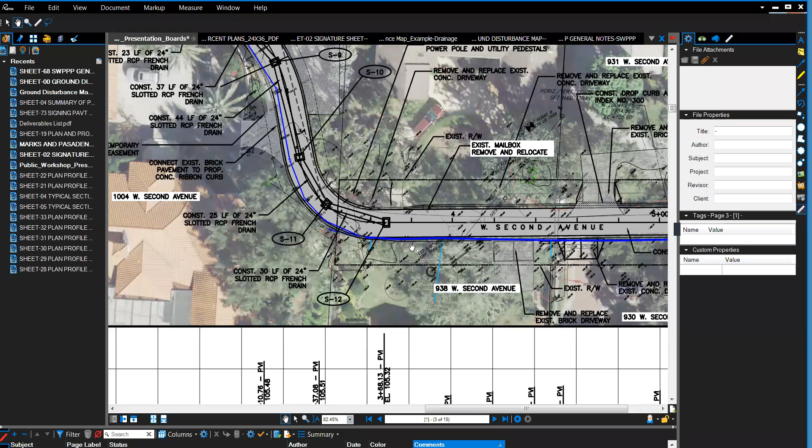Thanks, Corey. We don't want to piecemeal projects to where we're going to have to go in front of McCarthy's place and just mill and resurface that one section 10 years from now. It's probably been 6 or 8 years now. So anyway, great, thank you again.

Mike, real quick before we get to the Reams question, can you give a quick timeline of when you anticipate this going to DEM and then going out for bid, and possible construction timeframes?

I have to coordinate with DEM on their deliverable schedule, because they do have a specific list of deliverables they would like, and so I will go over that with them.

As far as the project schedule goes, once we've completed and satisfied phase 1 of the HMGP, they will take a look at phase 2 funding, and they will look at not just our plans, but also consider how construction costs are changing, because construction costs are escalating like no one's seen in the last several years. They'll take that into consideration when looking at how much they will fund for this project.

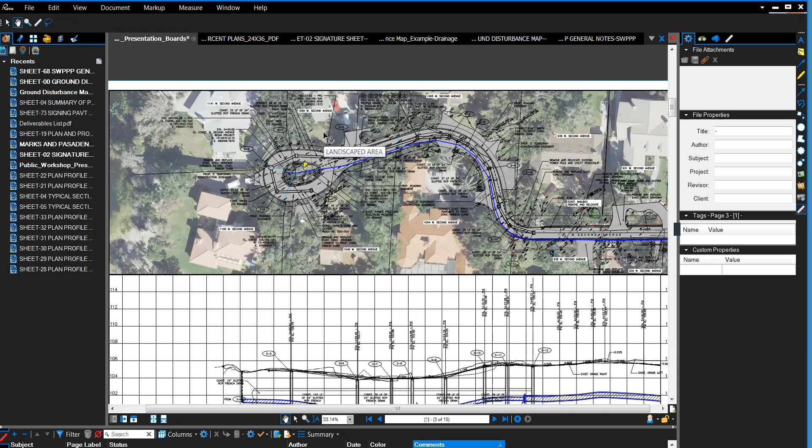So the fall of 2022? Yeah, that's just what I've been seeing assisting the city of Orlando on another project, and that's what they're running into right now - that kind of lag. And they are ahead of this project. A lot of it is because money is being allocated not just for Orange County, but for all the disaster counties in the state. So DEM has got their hands full, and we can see that with the turnover in project management.

What Mike is really referring to is, since this project has started, we've had 3 points of contact with DEM, and we expect that to continuously occur. So we have to have not only the typical regulatory agencies review this project, but also the grant funded Division of Emergency Management, who is reviewing these for the federal government, review them as well. It just adds another layer, which causes delays.

All right, well, thank you, Mike. And I see Barbara is back. I wish I could join you right now. Barbara, you guys have a question?

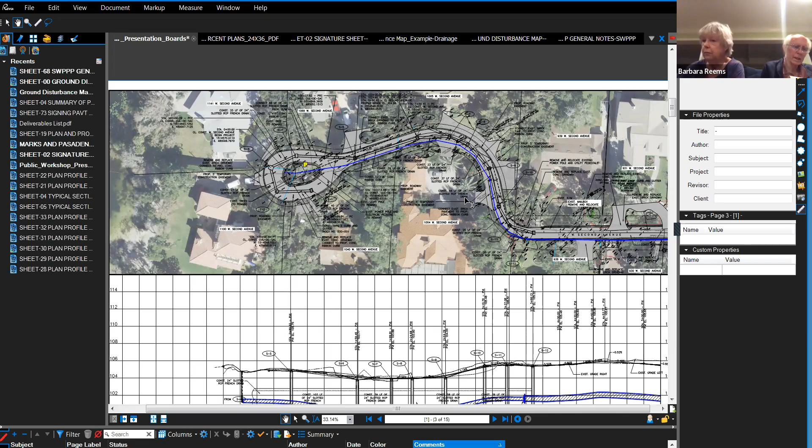Yes, Roland does have a question. Mike, I have two questions. In the beginning of the presentation, you indicated that we and the town work together on landscaping, driveways, irrigation, water main, and I want to be sure your detailed plans take a lot of this into account. We have not approached the town with specific requests. My impression was that I would have opportunities to do that when things started.

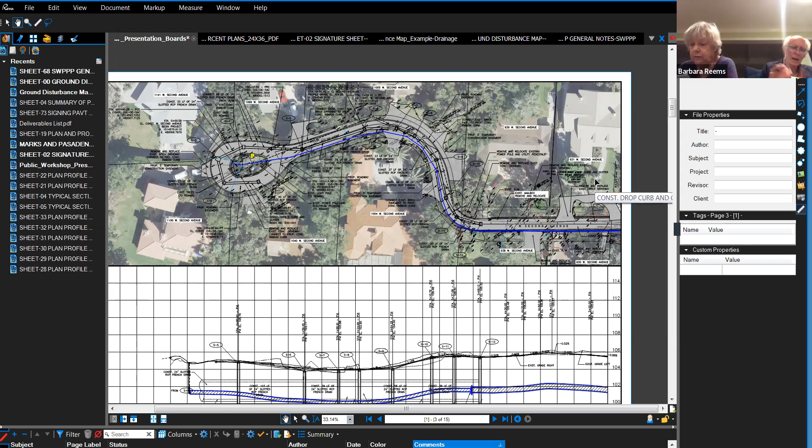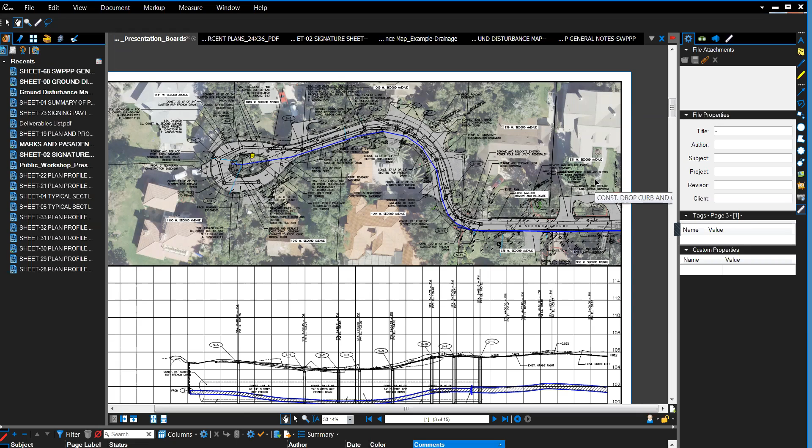It depends on the request. Did you talk to each homeowner? Yeah, every project is different, and every property owner has a different need or request. Every project we've worked with in the town, we've worked closely with that property owner to make sure we're not adversely impacting their property, and to make sure the end product presents the best restoration possible, whether it be relocating landscaping, driveways, or redoing irrigation because of things we've encountered. So the town has worked hard to maintain that working relationship with the property owner.

Mike, I think I can step in and help with this. Ms. Reems, John and I will be happy to come out with this plan sheet, and we'll go over what's happening in front of your area, and review that with you. Does that work for you?

Yes, that works fine. I think it's more a question of timing, like there's no sense talking about it. You missed it. Oh, I missed that. Yeah. It's okay, we're thinking about the fall. Okay, crystal ball. We don't need to do that now.

Like if you have Bahia versus St. Augustine or Centipede grass, we put in like kind as far as sodding, and like kind as far as what type of material your driveway is. But if you have a special tree or plant, an avocado tree or something like that, we'll be more than happy to work with you on relocating it, or even your mailbox. We work with a lot of individuals on relocating the mailbox if it needs to be relocated.

I'm not asking my question quite right. I understand what you said. I want to be sure we're not remiss in being more active in presenting these details right now. We've spoken to John and talked about the property. I just didn't want to miss a step in the process. It doesn't sound like I am. No, you're not.

I'll go to my second question then, kind of a nosy question. How's it going with the water main and Orange County Utilities? Are they going to be folks that do this in a timely way, the way we're looking for? Well, the only thing they do is review and approve. We do the construction. Orange County Utilities doesn't do the construction.

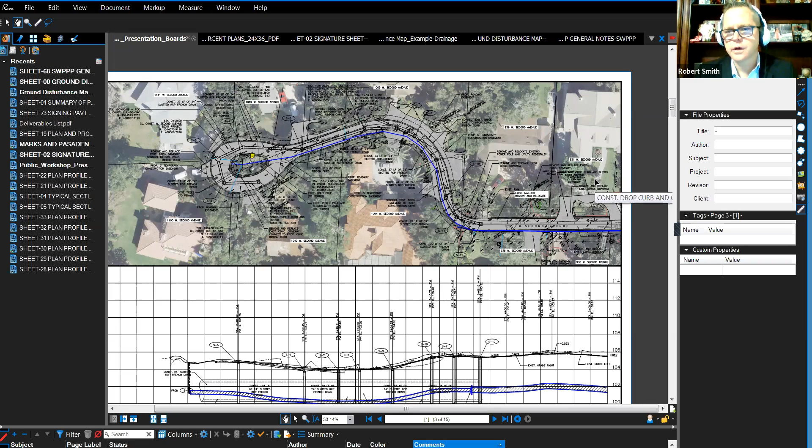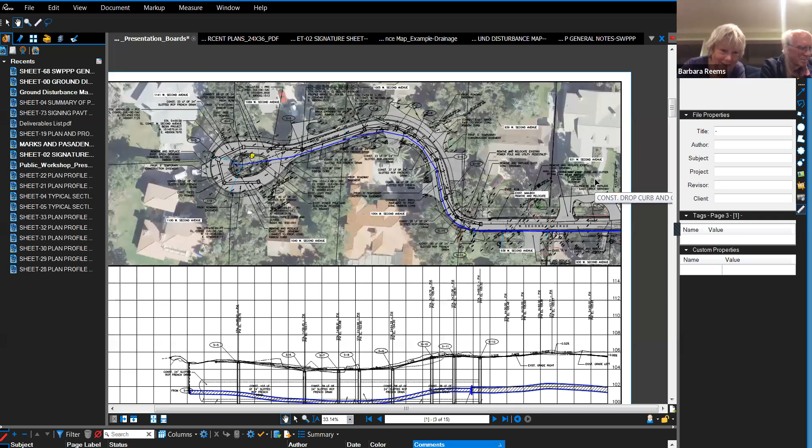Let me scroll through and see if there's any additional questions. I don't see any. Again, happy holidays, Merry Christmas, and we're looking forward to a great 2022 and getting these roads fixed and at an appropriate width so you can pass by your neighbors and wave without driving into somebody's lawn. Thank you, everyone, for your participation. Thank you, everybody, appreciate it. Good night, have a great night.